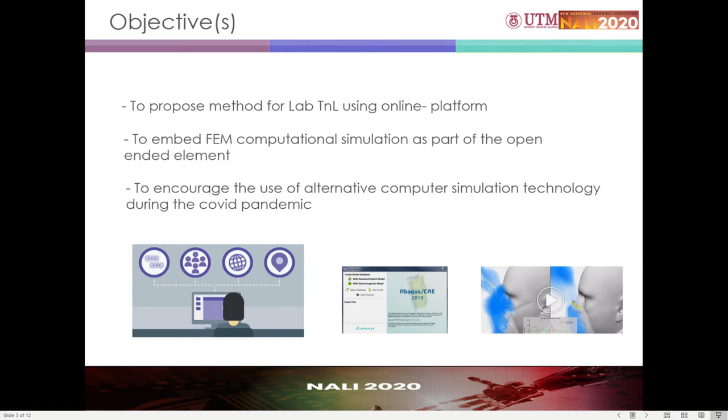We have stated three objectives of this work. The first one is to propose a method for lab teaching and learning using an online platform. The online platform is the only option that we have, since the students cannot enter the campus, so they have to continue their study for this course, the lab experiment, using the online platform. At the same time, we try to embed the FEM computational simulation. This is where the technology is used as part of the open-ended element. And finally, we want to encourage the use of alternative computer simulation technology, especially during COVID-19.

Here is the framework on how the approach is practiced in this teaching and learning. Firstly, the students use the online platform; at UTM we use e-learning as our online platform. We conducted a video lecture showing the students the facilities and the experimental apparatus, and we explain the steps in general. Only the general procedures are provided, in the form of a document which is distributed to the students.

The next task is, since the students are given only the general procedure, they have to plan a detailed procedure on how to conduct the experiment by analyzing the shown video. At the same time, most of the lecturers provide some raw data. This raw data is not the ideal one, so the error is within the data. The task for the students is to analyze the data, identify the error, and interpret the data. By interpreting the data, the students can guess what is wrong and what is right with the data, and they will find ways to improve the experimental work so that the accuracy can be increased.

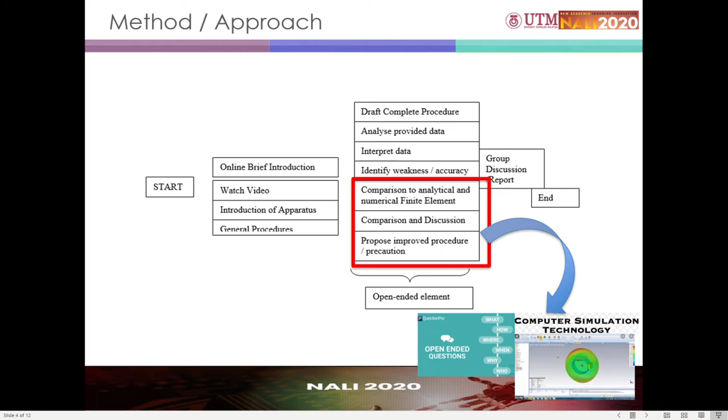So from the comparison between the physical experimental data and the computational simulation, they will suggest any method on how to improve the experiment. This is done from the group discussion. Next, here is an example of how we conduct the simulation.

By using the online platform, students are shown the video of the detailed experimental setup, for example the computer, and then the apparatus are explained by our technician, and how to conduct the experiment in general. All the documented material is given using the online e-learning, which belongs to University Technology Malaysia. So here is some of the general information on the experiment.

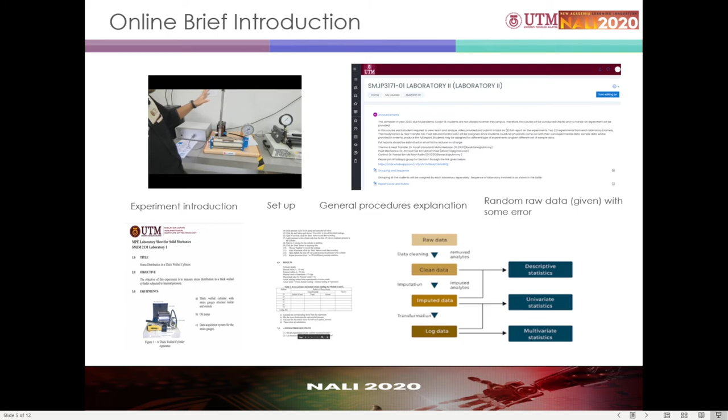It's very general, not detailed, because the students need to develop the detailed procedure, analyze the raw data, tabulate the data, and then interpret the data. So here are some of the steps. This is what we see as part of the open-ended element. At the same time, we want to enhance this open-ended element. Since they did not conduct the experiment physically, they need something to enhance their understanding.

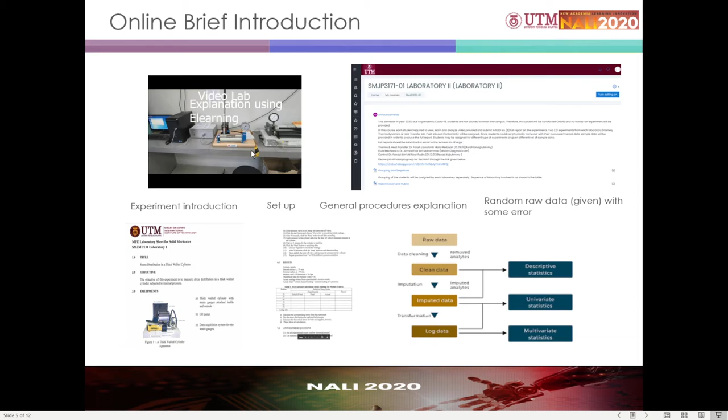So what we do is we introduce the computational simulation. As I mentioned in the previous slide, they need to explain the experiment in detail, step by step, interpret the physical data, analyze the raw data, and then come up with the physical meaning. By understanding the physical meaning, how can they represent it through computational simulation? This will enhance their understanding.

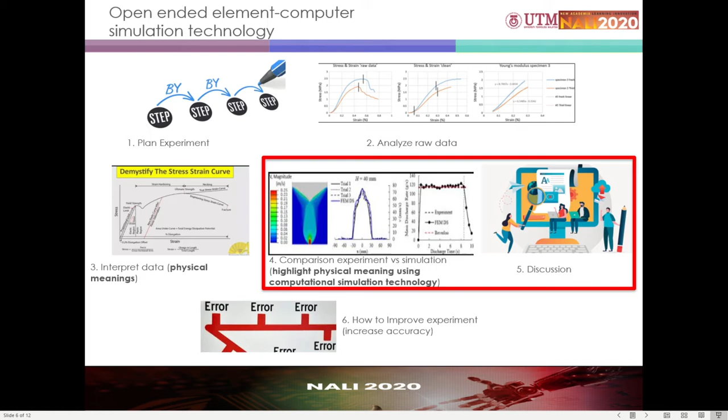As mentioned just now, once they start comparing the computational simulation result and the experimental result, they will identify the abnormality or errors found in the experiment. So they will propose how they can improve the real physical experiment. Here is an example conducted in one of the mechanical engineering labs.

The experiment is on stress distribution in a thick wall. Of course, by using the online platform, the students are shown the experimental apparatus, and the data are all given. Once they interpret, analyze, and tabulate the data, they need to show the physical meaning of the experimental result through computational simulation.

So in this example, they are briefed to conduct the experiment to search the strain property at different locations. Here is the cross section of the thick cylinder. For non-engineering students, it's hard to imagine how they can get the strain measured within this thick cylinder. By having a computational simulation, they can imagine that the measurement is done across the thickness of the thick cylinder.

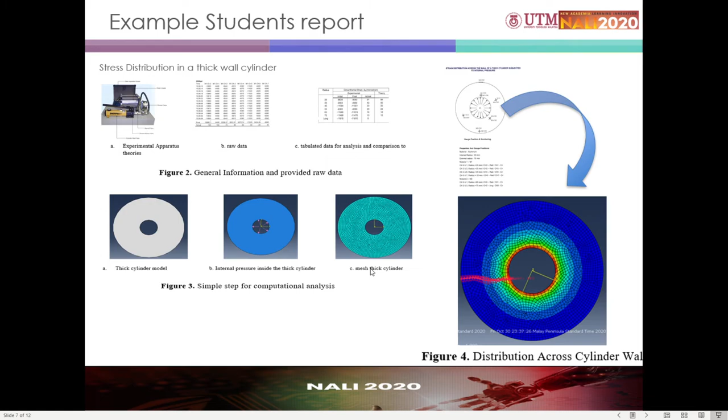Once they completed the simulation, they compare the result from the experimental work, and at the same time with the computation from the theories they learned during solid mechanics. So before they start working on this experiment, it is compulsory for them to take a lecture on solid mechanics so they can compare the result, since the computational simulation is embedded in this experimental work.

In this example, the student uses Abaqus to get the simulation result. So three results are compared here: the experiment, the theoretical analytical computation that they learn during their conventional solid mechanics lecture, and the finite element or computational simulation using Abaqus.

This is very open-ended because they have to explore the computational simulation on their own. It's very simple, but they can understand the physical meaning clearly. By having this computational simulation, they start thinking - this is blue color, this is green color, this is red color. So what are the differences?

From the result, they notice that the strain values are all in positive value, that's why they got this color, in comparison to this one, where these are negative values.

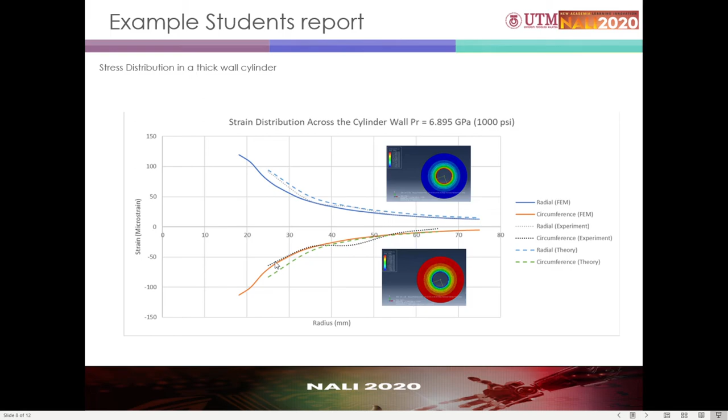From that they can conclude that there is a variation of strain value from the very inside of the thickness of the cylinder to the outer surface of the cylinder. The comparison can be seen from this graph, so they can make very good conclusions, and at the same time see the relationship between the experimental work and the simulation.

This is the target of our engineering education - we want the student to see the relationship between what they learn during lecture and the real experiment, and at the same time compare with the computational simulation, which enhances their comprehension.

They can check the strain property at all positions, and at the same time explore and change the design of the cylinder - changing the material property, the thickness of the cylinder. This will advance their understanding.

All these are explained during their brief session before they start working on this simulation, so that they can understand it clearer and better.

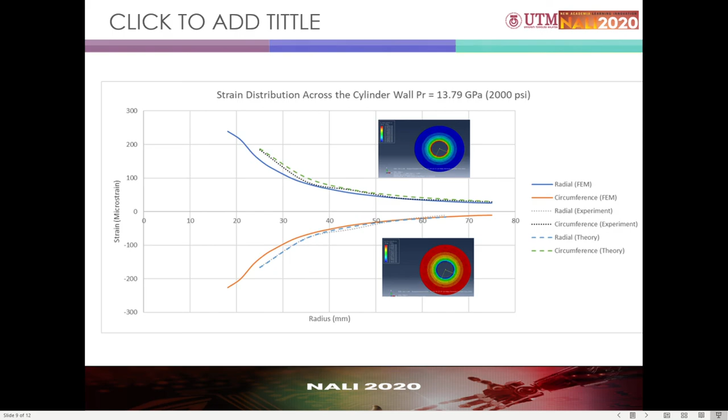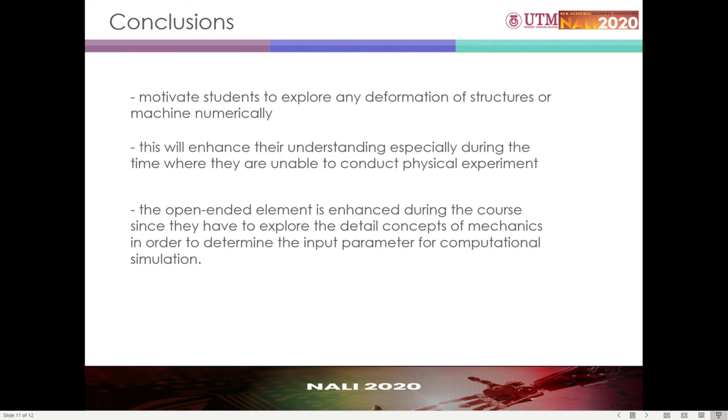So that's all for my presentation. Thank you.